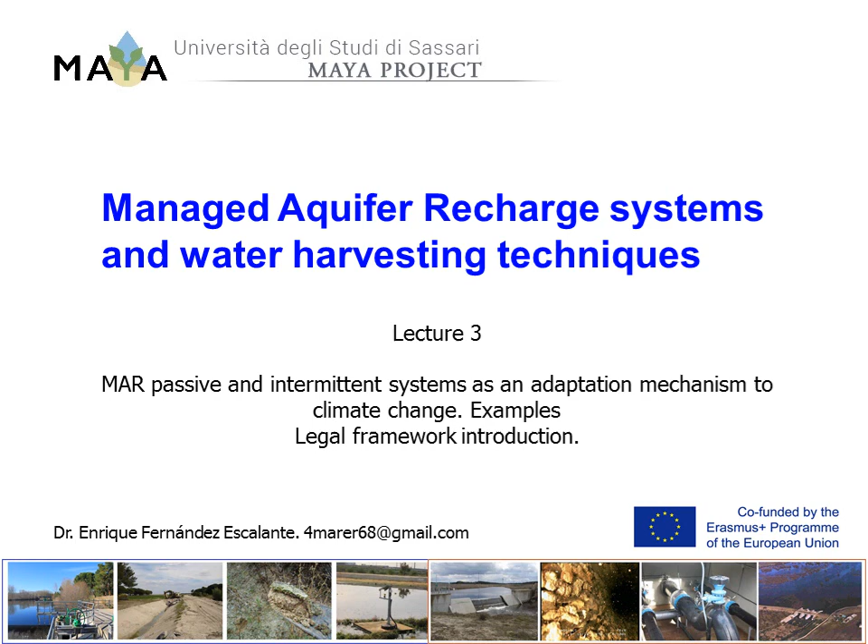In the third lecture, we'll talk about MAR passive and intermittent systems, the detention-infiltration and the retention-infiltration systems, the combinations of water from different sources, some examples of reuse, legal aspects, exercises, and additional materials.

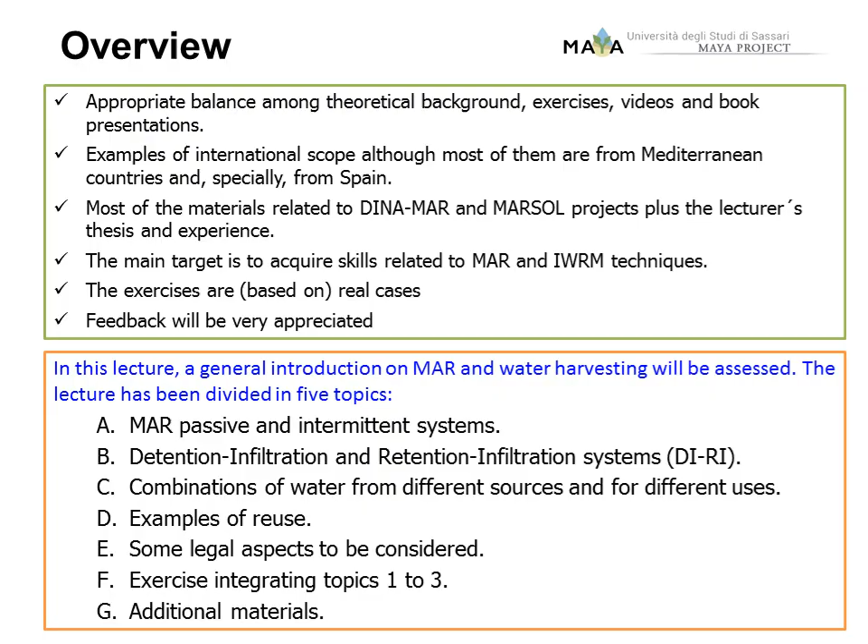Managed aquifer recharge intermittent, temporal, or of opportunity systems are in general passive systems. They work especially when some extreme water-related event occurs and are usual in arid and semi-arid areas, with eventual flooding events. I remind that the passive system is that one which does not require electricity to work.

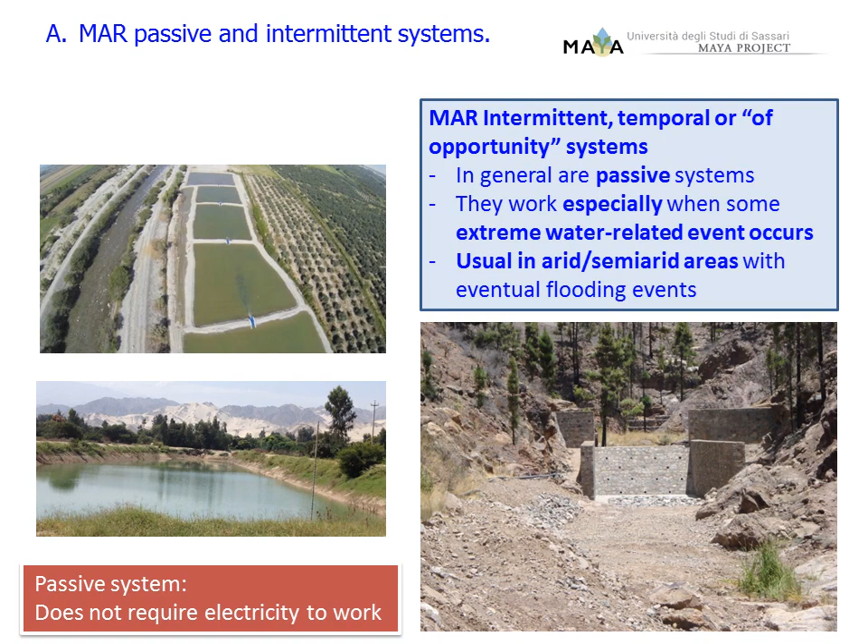Dikes are key elements for MAR passive intermittent systems and for water harvesting too. They slow down the energy of the water. They get a volume detention, retention, and infiltration. They are either surface or underground systems, and they have multiple designs, either drilled or made of gabions, etc.

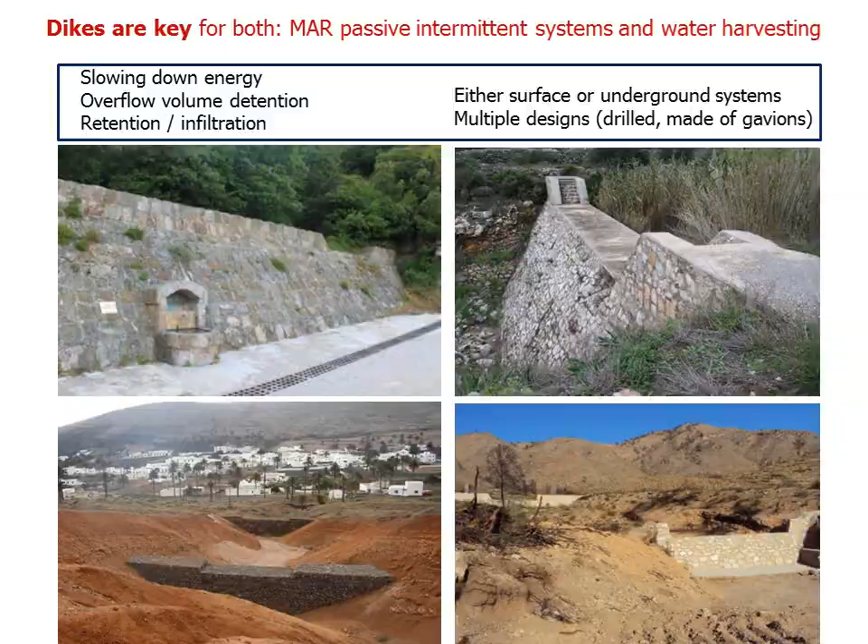Once again, one detention-infiltration system stops the water and infiltrates a part of it, and one retention system, once it stops the water, retains it for its later infiltration. The actions against extreme water-related events have been grouped in three chapters: droughts, overfloods, and actions in urban areas.

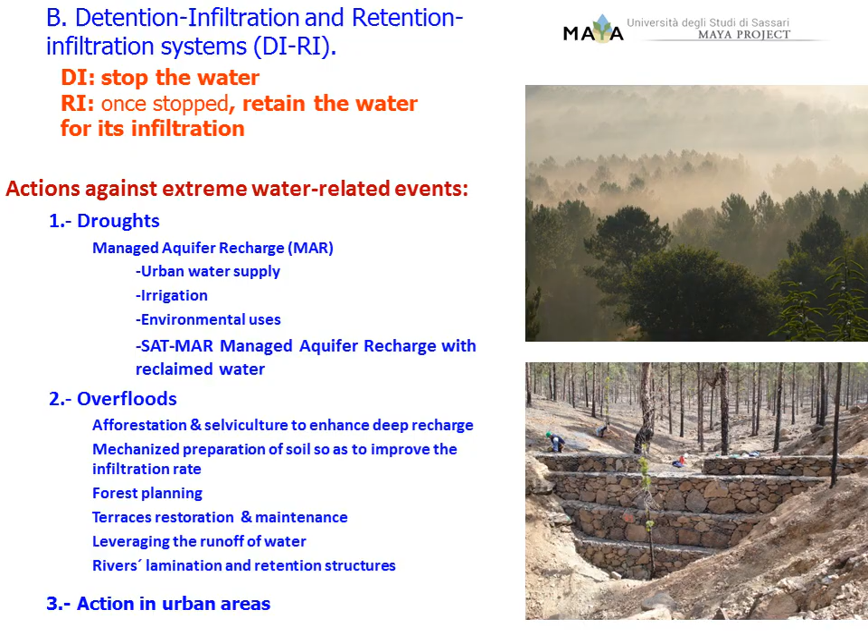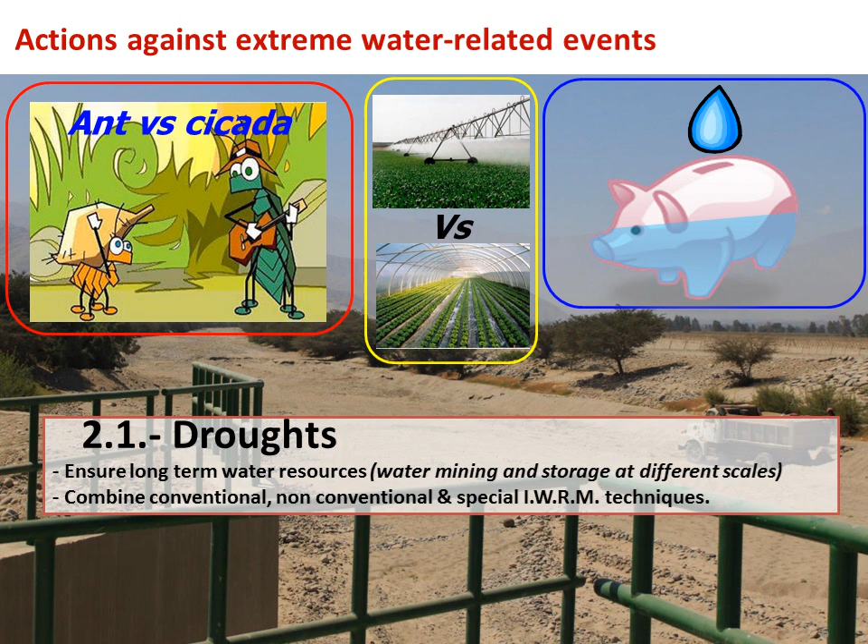Talking about droughts, it's important to remind the tale of the ant and the cicada. The ant was working the whole summer to have some food during the winter time, and the cicada was playing the guitar and napping, and when the winter came, she starved. So there is an analogous situation: to store water in the aquifers or to do as the cicada.

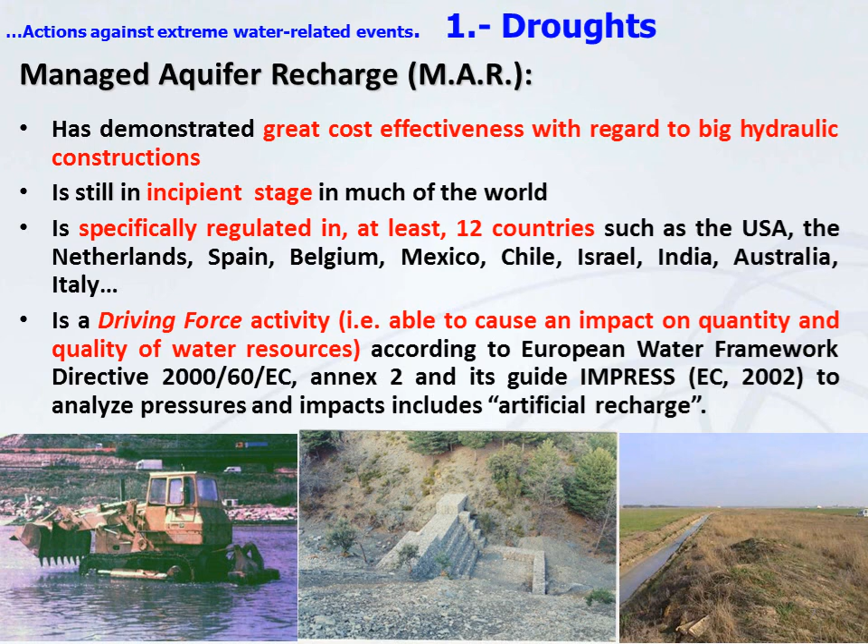Managed aquifer recharge, or MAR, has demonstrated a great cost-effectiveness with regard to big hydraulic constructions. It is still in an incipient stage in much of the world, is specifically regulated in at least 12 countries, and is also a driving force.

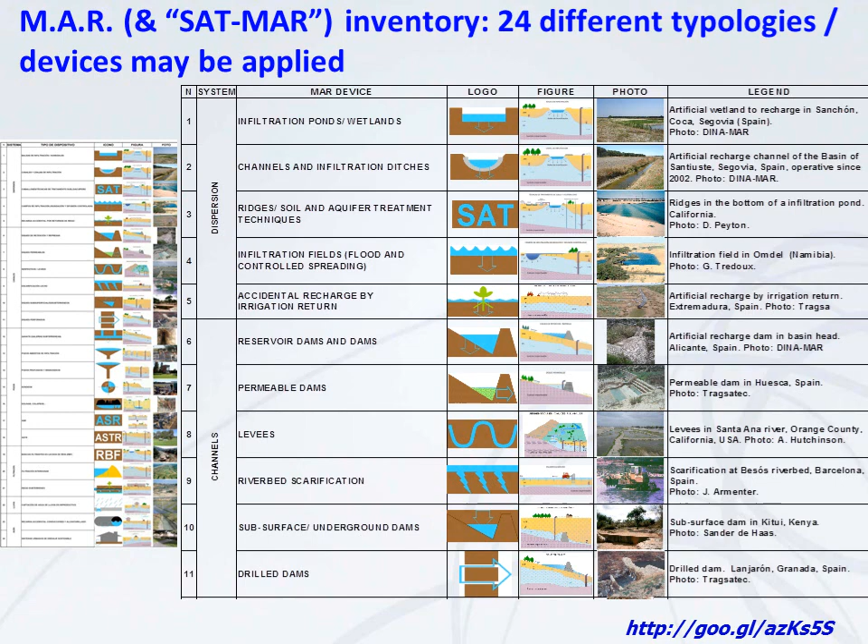In the MARSOL project was developed one inventory of 24 different typologies or devices for MAR facilities. It is accessible in the link below. This is the second part of this inventory.

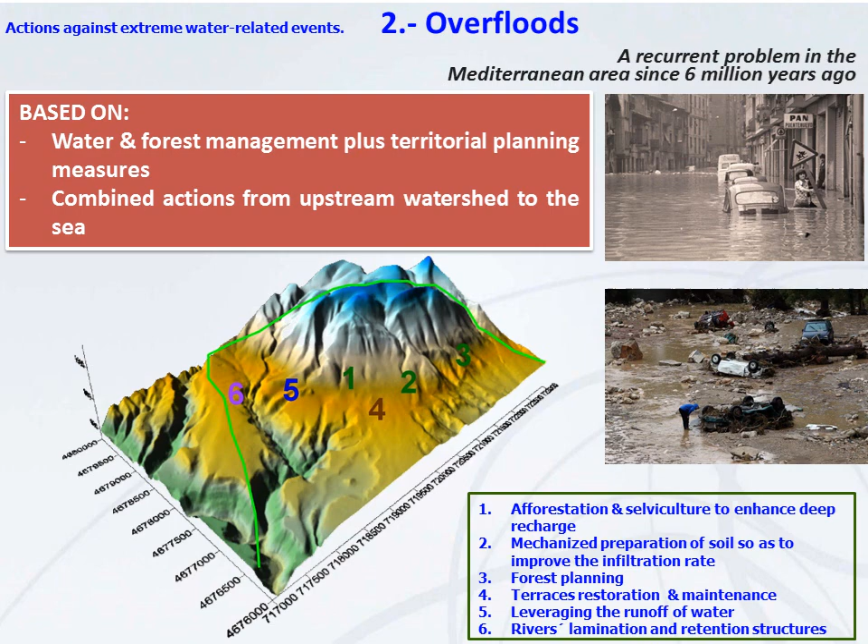Regarding overfloods, a recurrent problem in the Mediterranean area since 6 million years ago, it is based on water and forest management plus territorial planning measures and combined actions from upstream watershed to the sea. There are 6 different techniques included in this chapter.

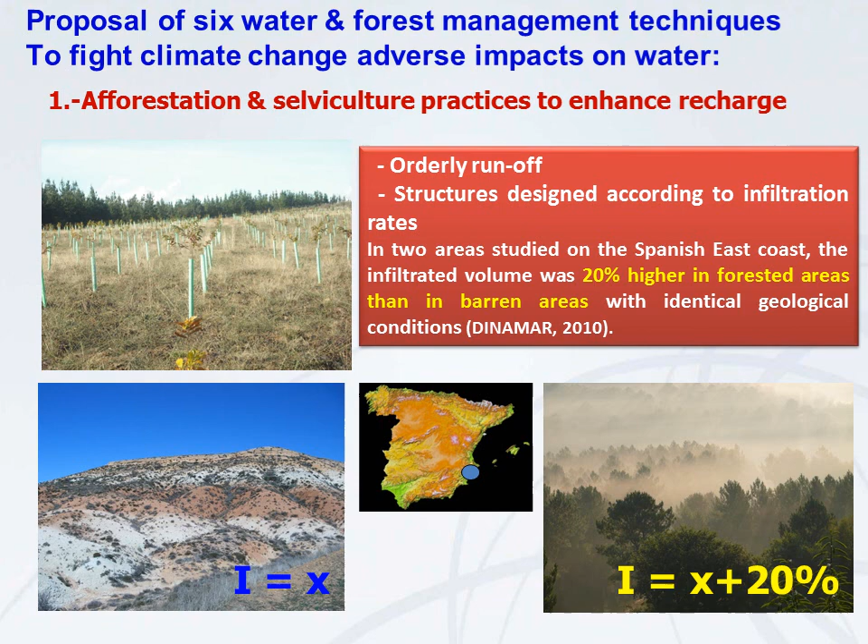The first of them is the afforestation and silviculture practices to enhance recharge, by means of orderly runoff structures designed according to infiltration rates. There are some examples where the infiltration in forested areas is even 20% higher than in barren areas.

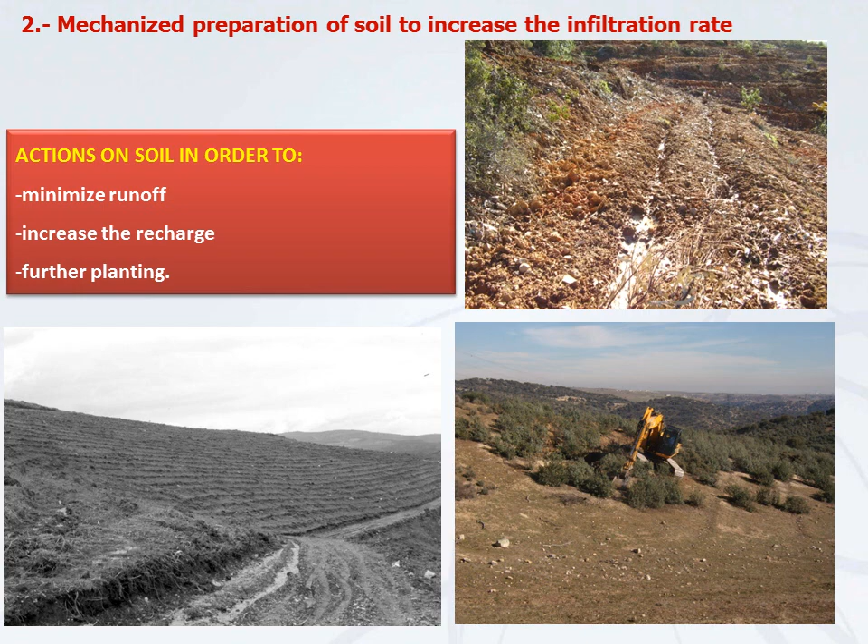The second one is the mechanized preparation of soil to increase the infiltration rate. The actions are conducted to minimize runoff, increase the recharge, and further planting. Here is an example of contour bunds regarding this previous example.

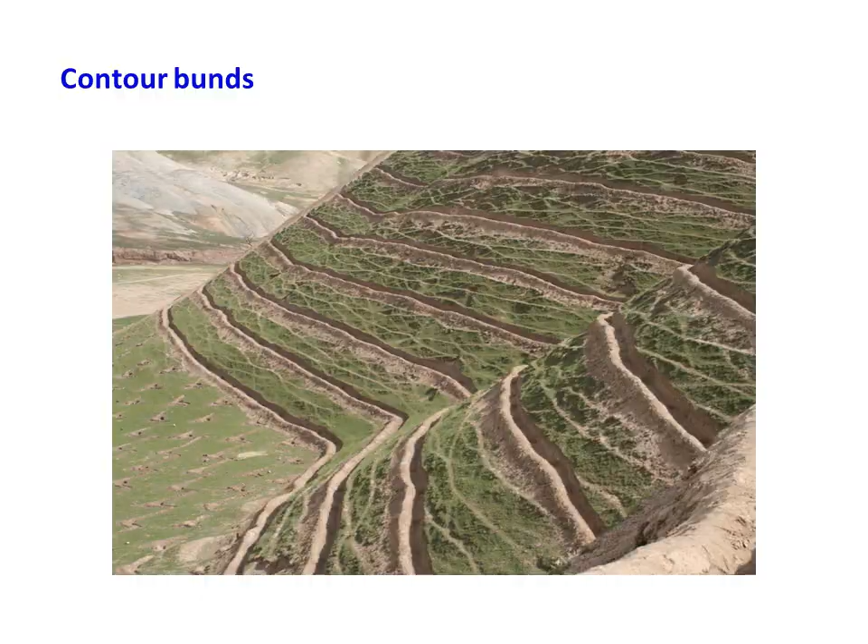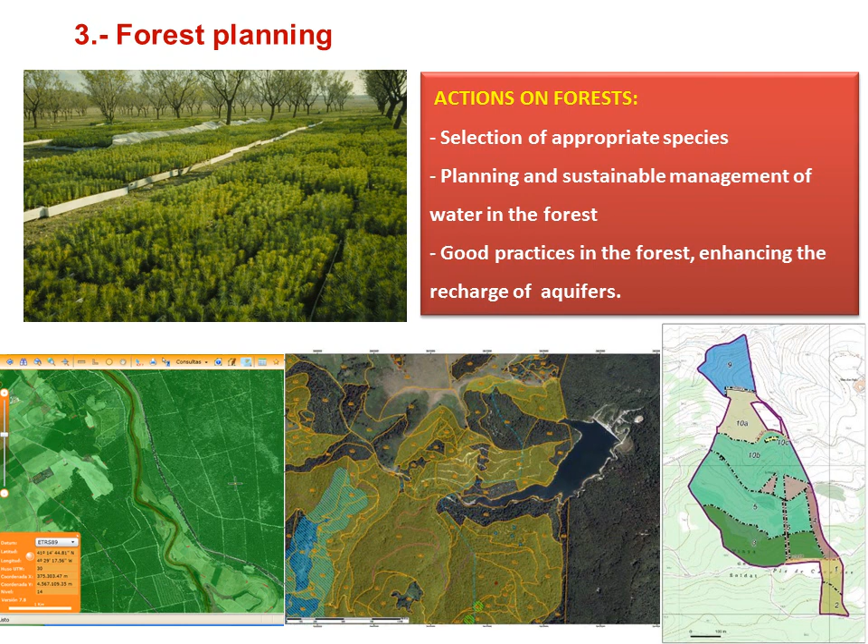In relation to forest planning, the actions are related to the selection of appropriate species, planning and sustainable management of water in the forest, and good practices in the forests, enhancing the recharge of the aquifers.

The fourth group of measures is based on the design, restoration, and maintenance of terraces. There are some specific structures called boqueras. They don't even have a translation into English, which are long furrows which divert high volumes of water in the over-flood, taking it towards croplands.

The second structure, also without translation into English, is atochadas. They are some structures made of sand, furrows, and dikes crossed to the basin flow direction with lateral diversions to store water temporarily in the terraces. They are based on the Roman principle divide et impera.

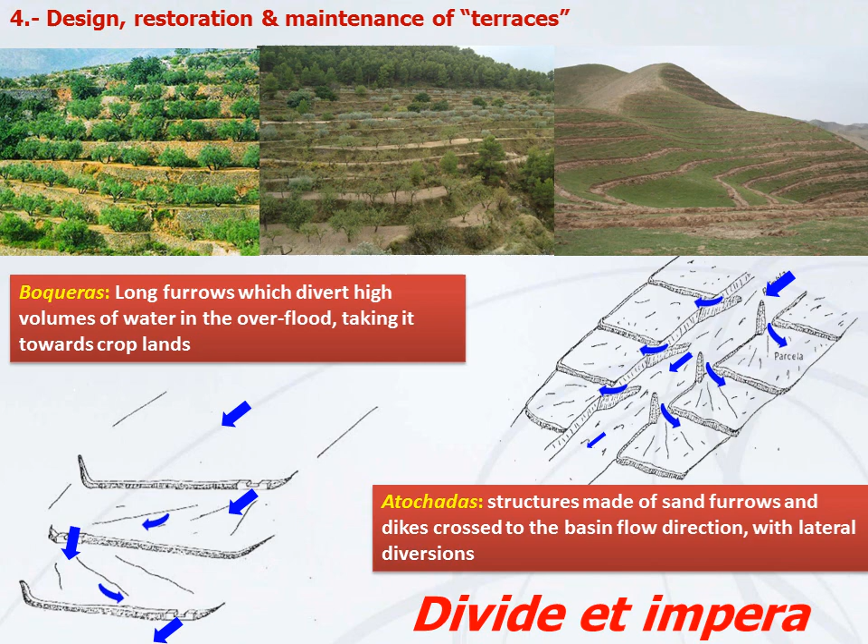Water runoff strengthening measures are based on the diversion of river water towards proper forest, decreasing the runoff volume, speeding up the recharge rates, stretching and delaying the time of concentration, and involving the whole forest in the process.

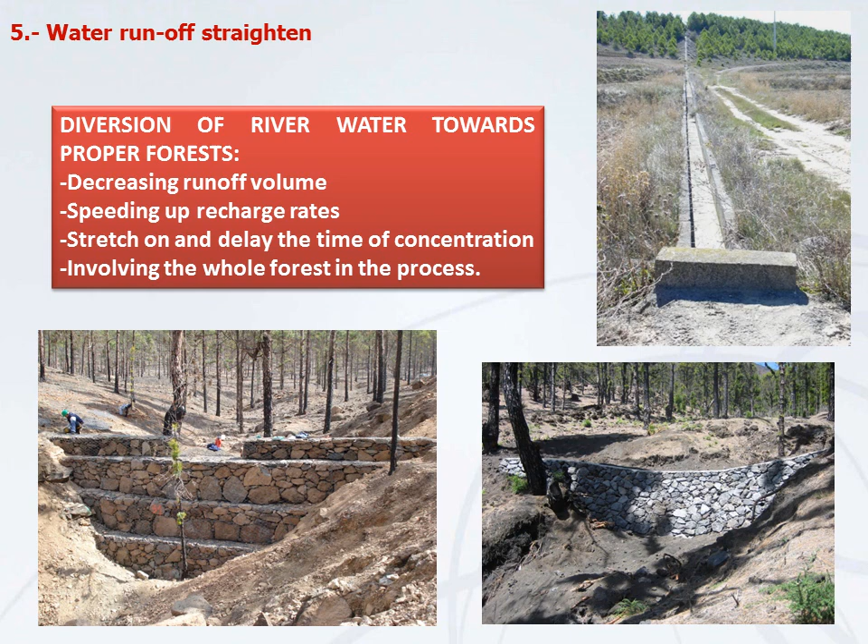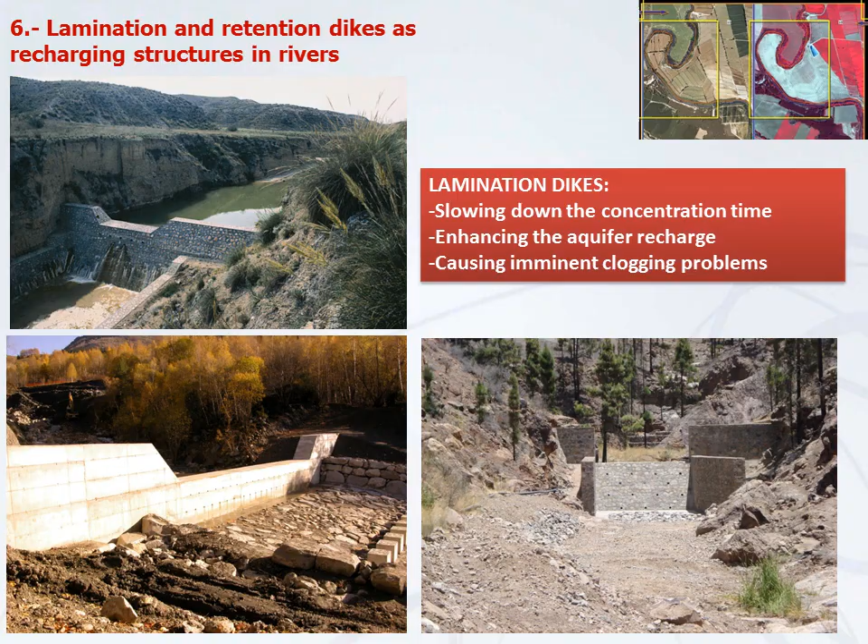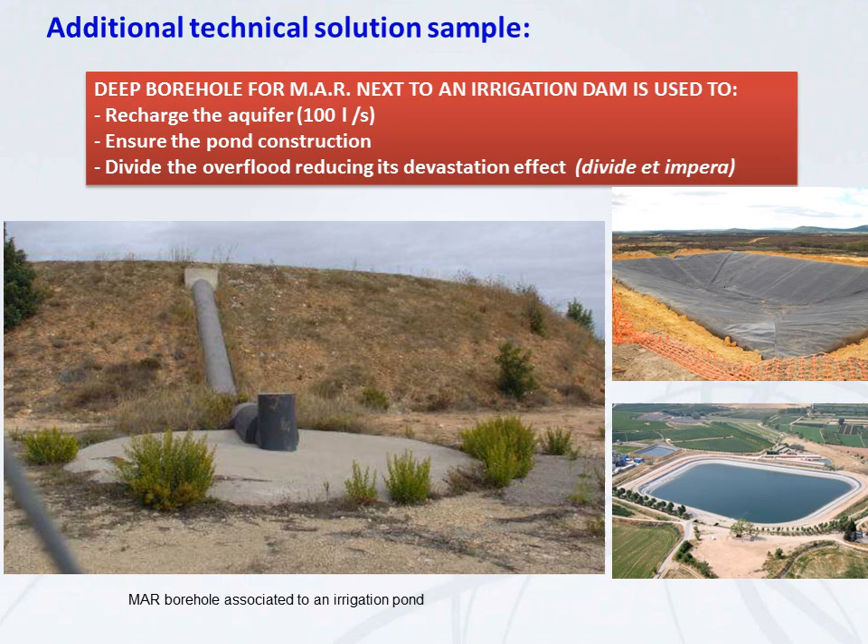Another additional technical solution sample is the deep borehole for MAR next to an irrigation dam, used to recharge the aquifer with even 100 liters per second during the overflow. They ensure the pond construction and divide the overflow, reducing its devastating effect. Again, the Roman principle divide et impera.

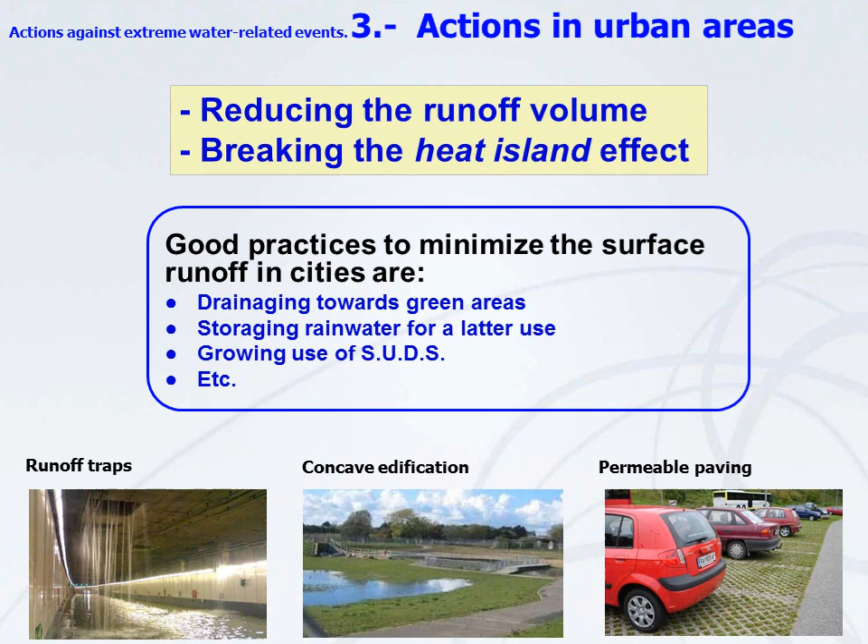Actions in urban areas tend to reduce the runoff volume and break the heat island effect. Some good practices to minimize the surface runoff in cities are draining towards green areas, storing rainwater for a later use, and the growing use of sustainable urban drainage systems, or SUDS.

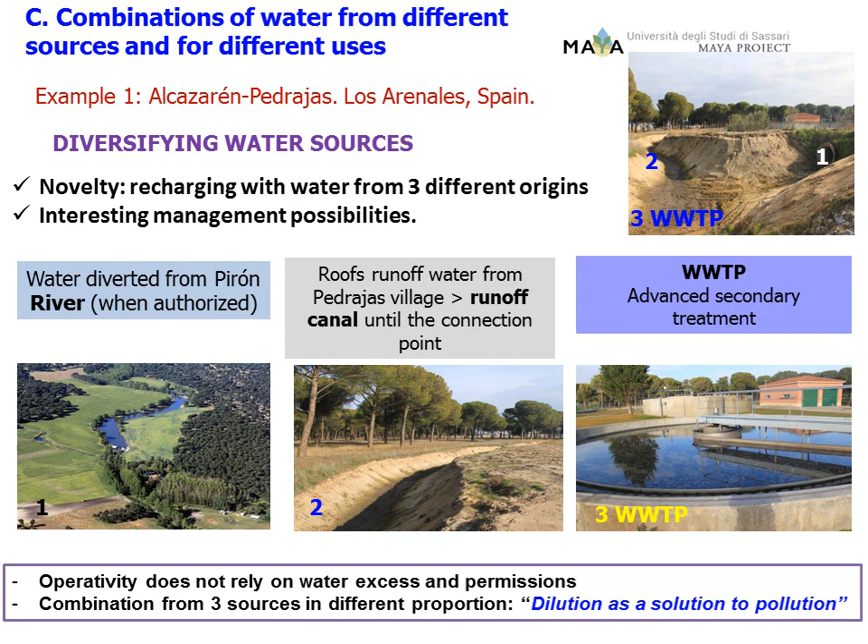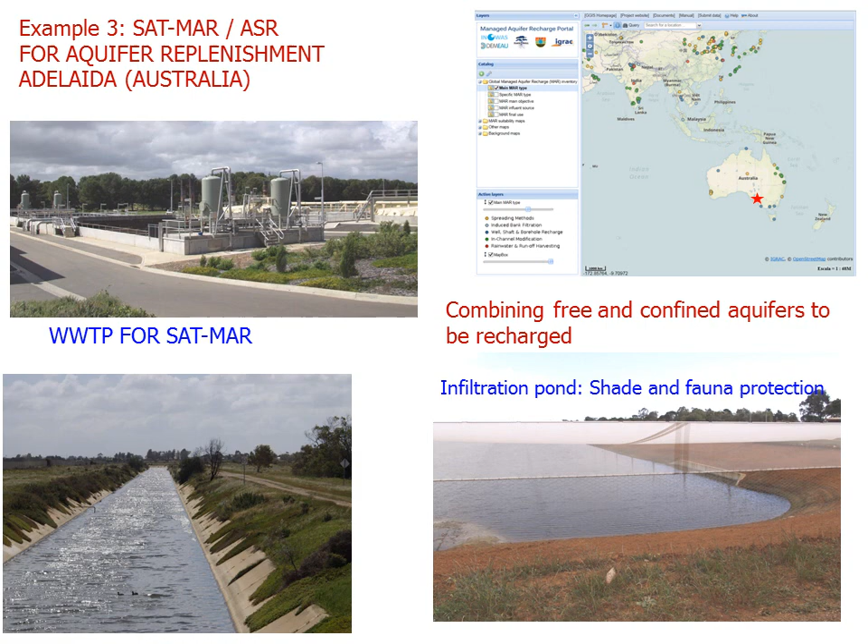Another good example for MAR, in this case for SAT-MAR, is in Adelaide in Australia, also for aquifer replenishment using water from the wastewater treatment plant and combining it with wells, boreholes, and infiltration ponds.

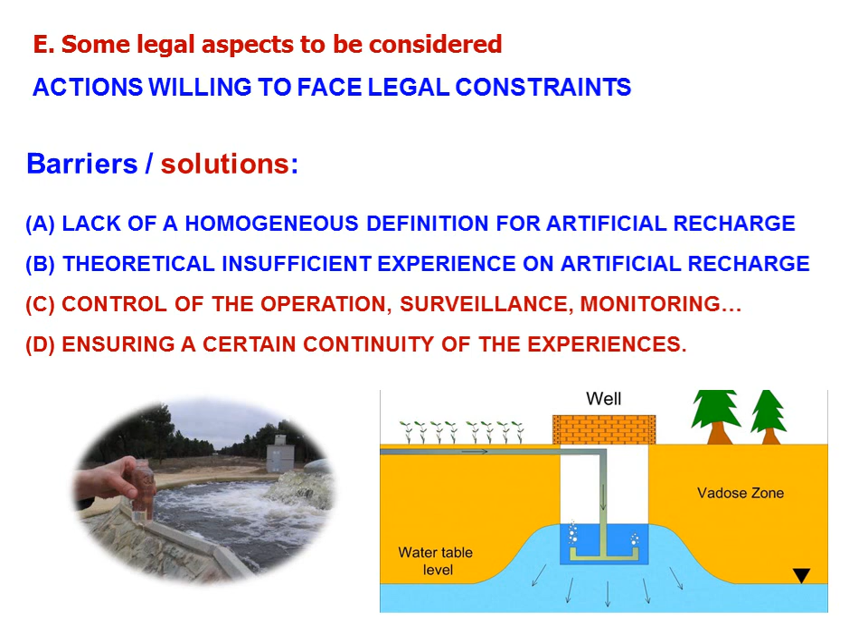Some future lines of action to be regulated apply for the demand of a unique and specific regulation for MAR definition in the whole of Europe, including at least the following aspects. One specific procedure for authorizations. Artificial recharge cannot be considered a spill any longer.

The financial aspects for artificial aquifer recharge are missing in the regulations, and the viability study for each case, to check whether the proposed technical solutions are legal and viable, should be applied prior to its construction.

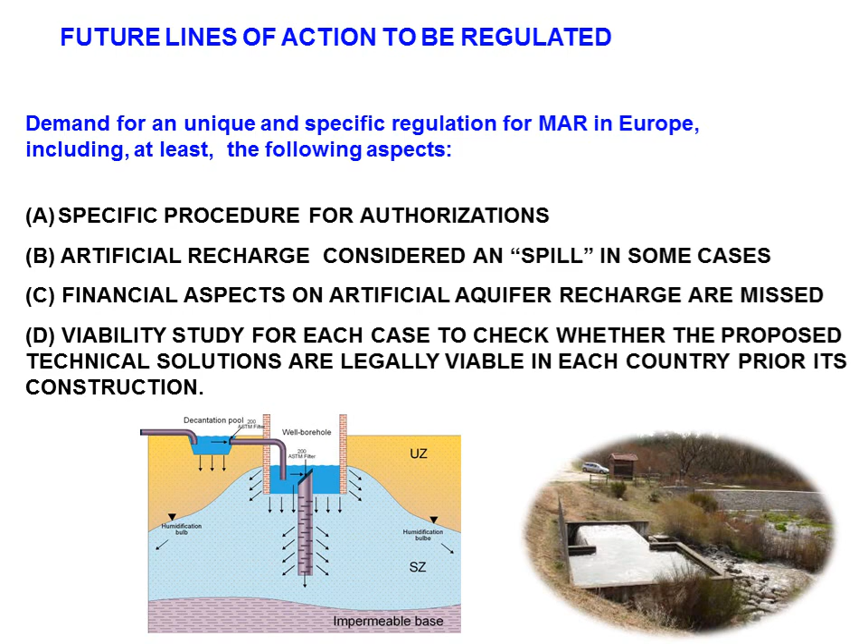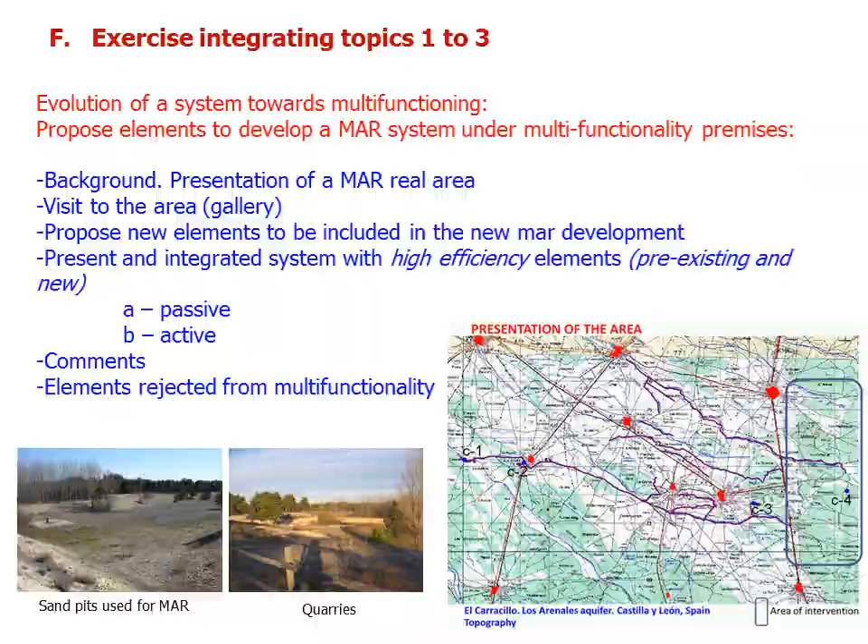As additional materials, there are 3 references and a set of videos and deliverables from different European projects.